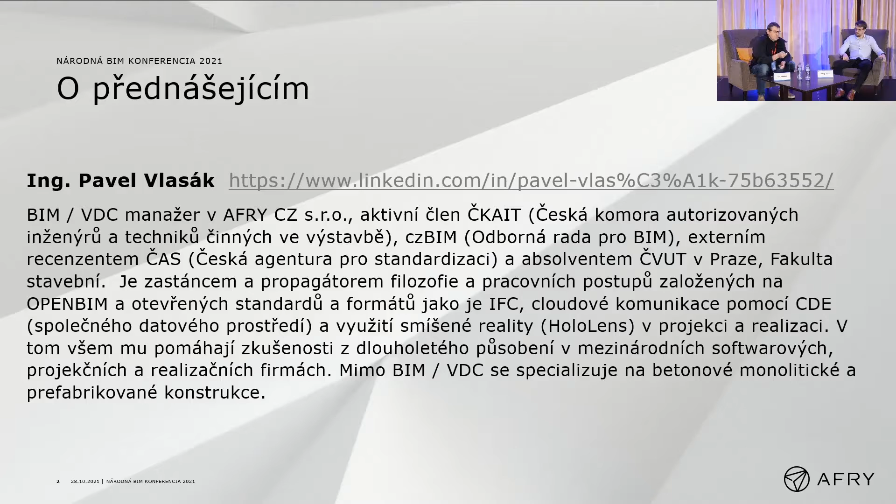We both work at AFRY, an international company with more than 16,000 designers and a mother company in Sweden. We are innovative, transparent, and sustainable. That's what you will see on our web pages.

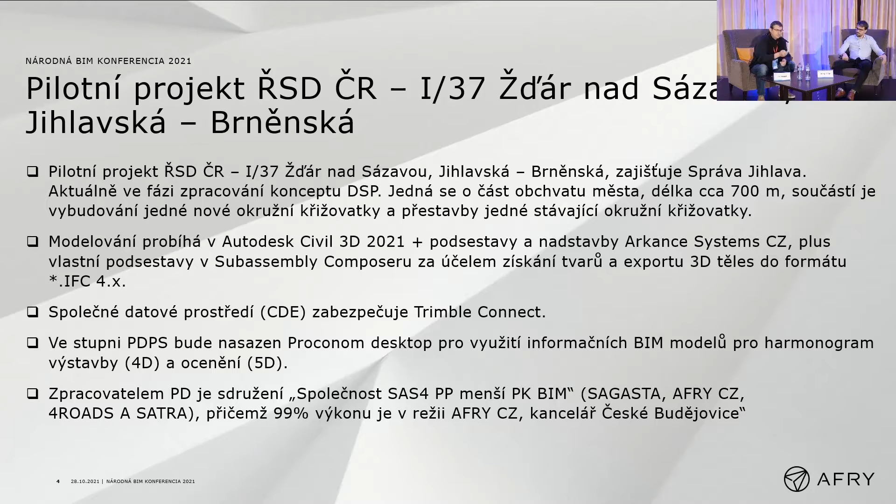Also communication through CDE. We do have an infrastructure data standard, a state fund for transport infrastructure, so we needed to find a way to process the non-graphical information according to the client's specification.

When we look at those 3 or 4 areas, in order to say that the project was processed through BIM, we need the documentation - 3D documentation, non-graphical information processed through BIM - and the output needs to always be in IFC format and according to the data standard of the state infrastructure fund.

AFRY is one of the suppliers, one of the authors of the data standard. Of course, you need to have a BIM execution plan or BIM protocol, and we should communicate through the common data environment.

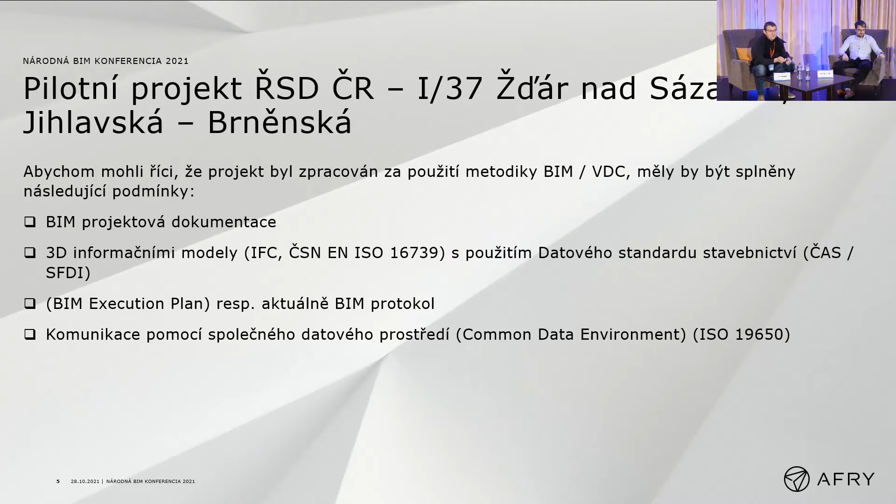Once you are going to check whether a public project was implemented via BIM or with BIM, then you need to tick all those boxes.

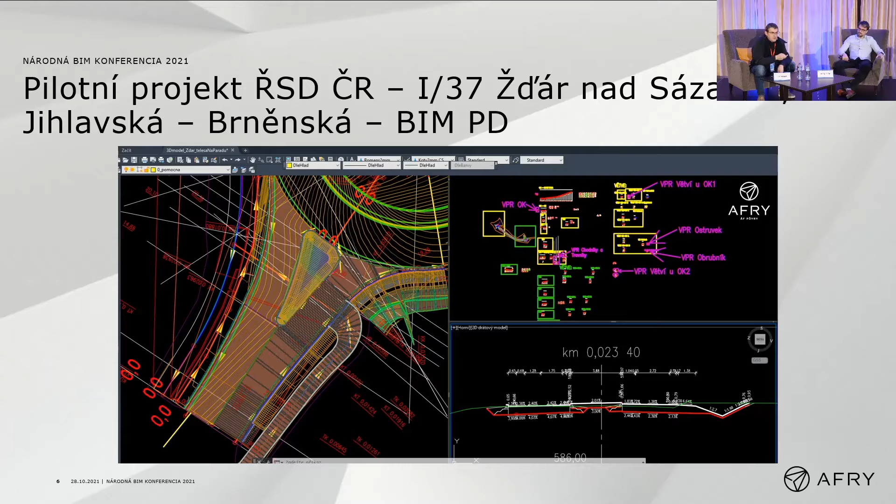This was a road in Žďár inside the municipality, and there was a reconstruction of an existing roundabout and building up a new one. Civil 3D software was used.

We used additional structures supplied by a specific company, but first we needed to build the knowledge inside our company. The communication with the director of highways was organized through Trimble Connect.

You see demolitions, networks, if we knew the location, and the new communication plus the roundabouts were to take into consideration the existing infrastructure and utility networks.

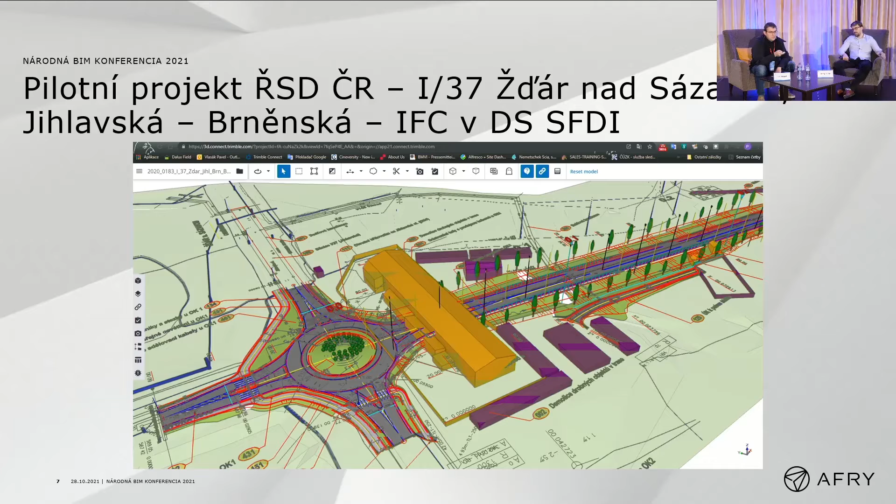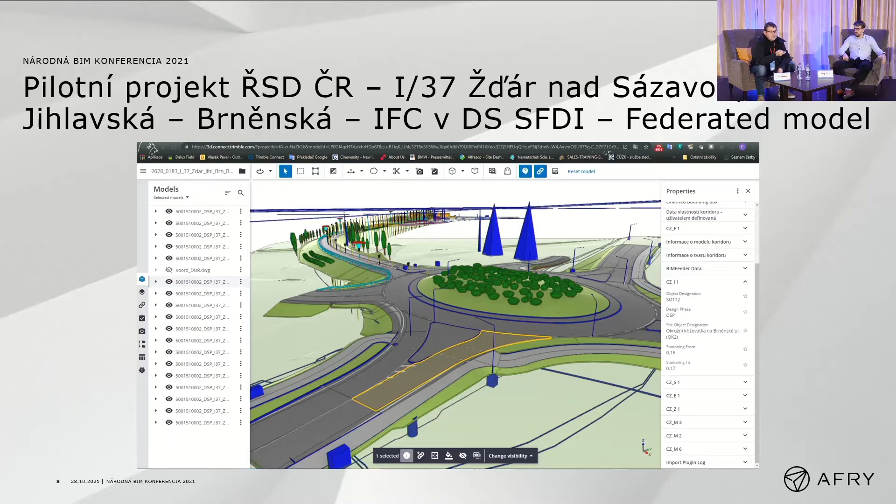We see individual parts of the project according to the data standard. We can validate the data in Trimble Connect environment that comes from the data standard with the real volumes of the objects, and we do cross checks.

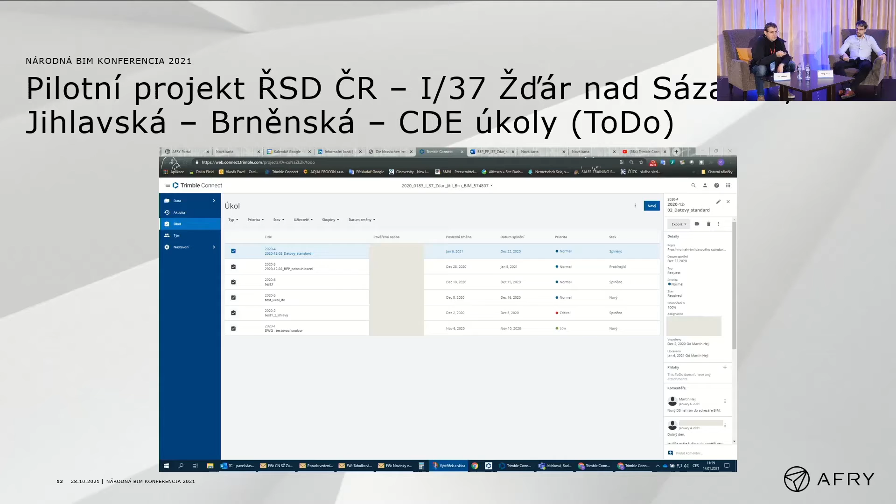We have created the web, and those entities like the director of highways and other involved actors have a certain given structure of their documents, and we communicated with the client and us as designers relatively intensely, I may say. What was very important was the audit footprint with CDE.

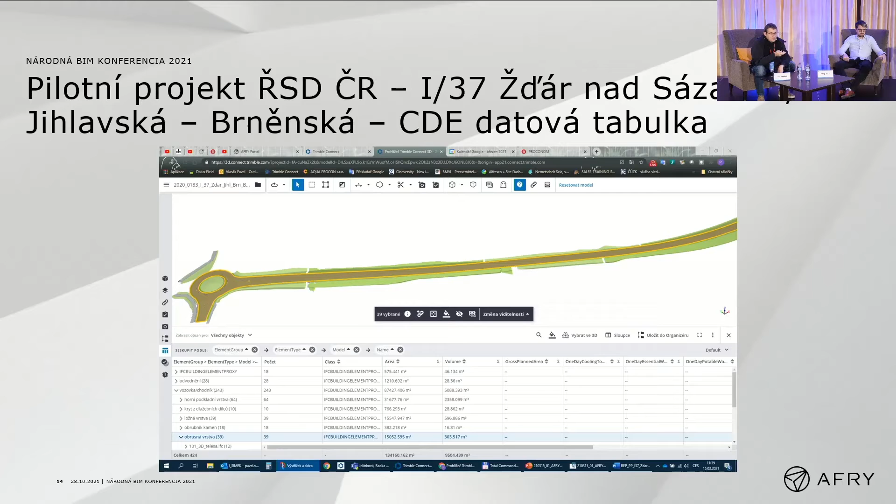This is one of the advantages of CDE - you have all the data in one place. Currently, we are trying to deal with international classification and linking to it, and Proconom company solution is what we use in this project.

And I'd like to hand it over to my colleague.

This is our internal pilot project on how the bridges are designed. I work in the Prague branch of AFRY, and I would like to introduce you to an alternative approach to the design of construction structures - this is parametric design.

It is the use of Dynamo or Grasshopper programs. First, we need to understand what it means and what it is. Computational design is a very important notion for us, and that is an alternative solution or design.

We don't have 2D drawings, but we create machine algorithms that are interconnected and that create the structure as a whole or its individual components.

Each individual script is defined via graphical programming, which is a type of programming that may be more favorable and more understandable for an ordinary designer.

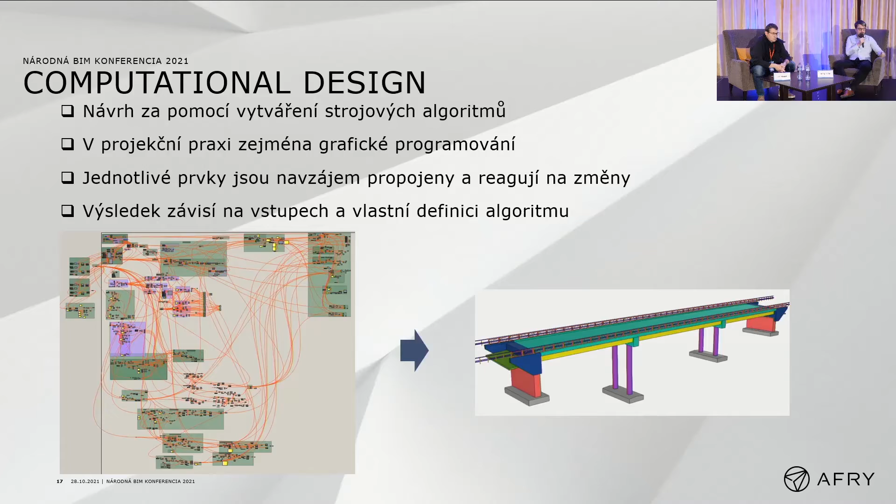Why do I say that? In our department we are trying to get ready for BIM projects and workflow, and we are trying to be one step ahead of the curve - we want to be ready and able to work with those BIM projects very efficiently and in high quality.

What seems to be the most efficient, even though it's not perfect, is to use 3 levels of program. We always have certain inputs that don't need to be BIM or IFC inputs, but we can work with inputs used normally, like Civil 3D or other formats. This input is a 3D axis of communication that we link the bridge to.

Then there is a primary software we use that allows us to model the structure. We haven't opted for construction software but modeling software, because it doesn't limit us in complicated shapes. It doesn't tell us what we need to do - we need to teach it what it should do, but we can get more information out of it or make our life easier. Then we have secondary software.

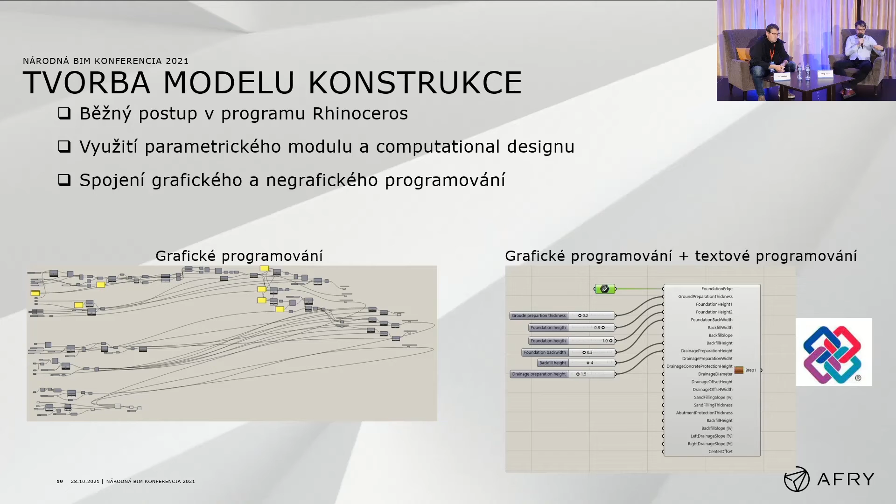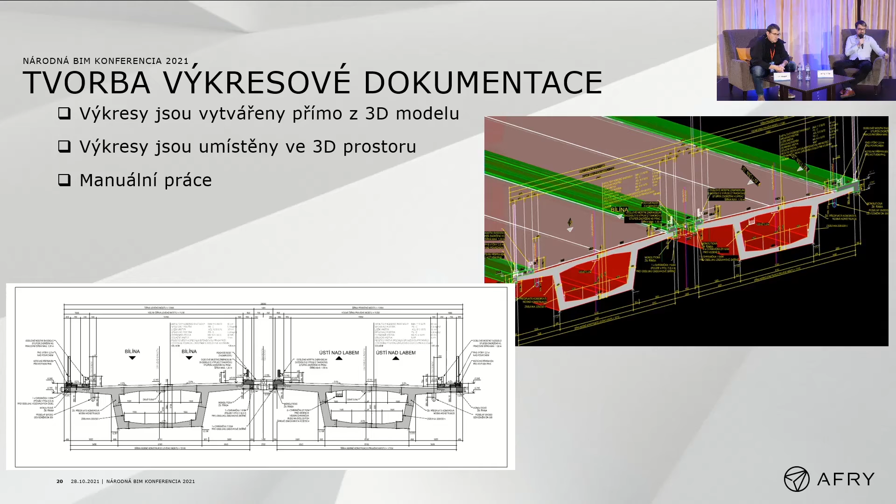When it comes to drawings, there's no rocket science here. Currently, we do drawings from 3D modeling models. We do a cut on the structure, and then of course we need to describe it. Currently we need to enter technical parameters as well. We need to do dimensioning, but how will this change in the future?

We can load the structure into the system. We can change the individual items of reinforcement, and also change the difference and play with the scenarios.

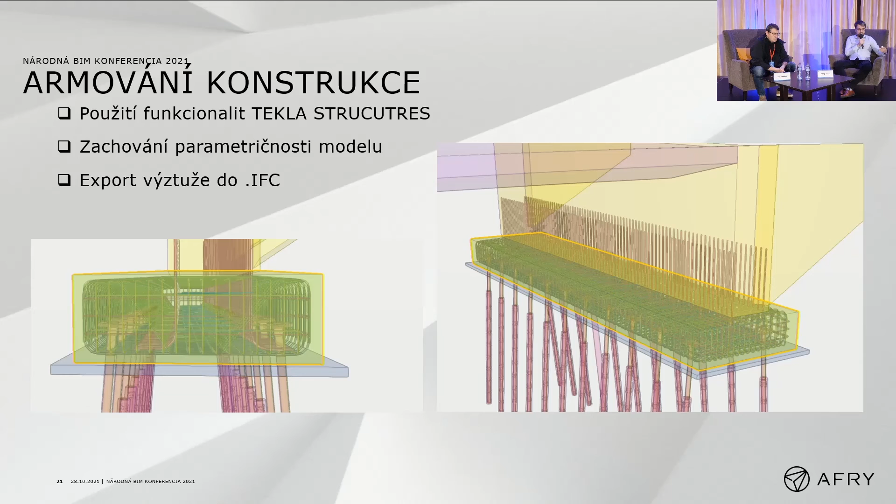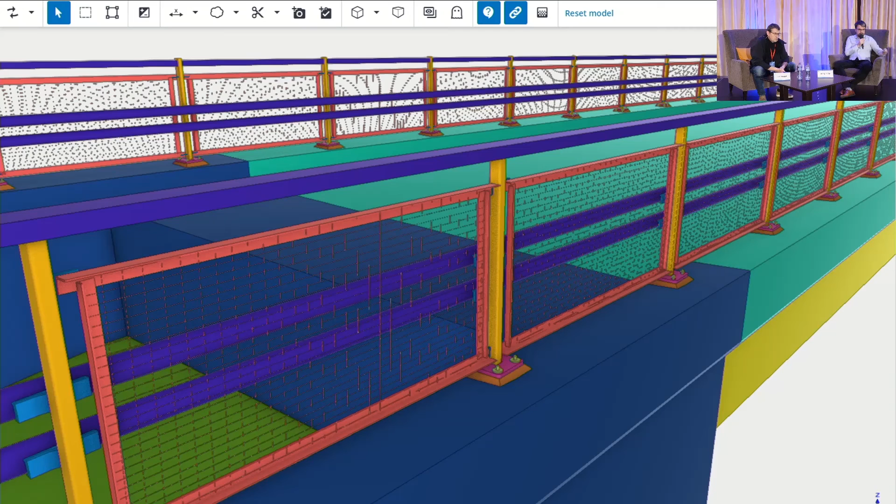Next is IFC format creation. We use native exporters. We can set the level of detail - you see very detailed railing here. And of course, in the export, you need to add it or combine it with data export. I'm not saying that it's constant, but it's different for each and every project.

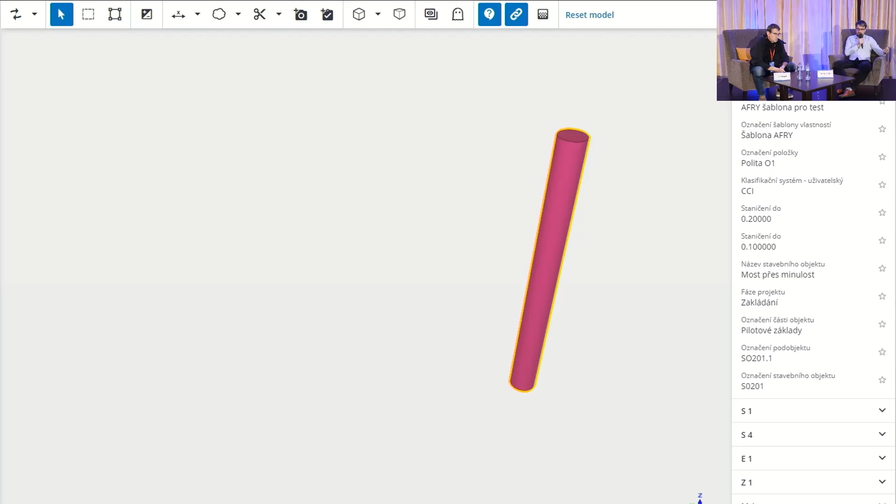Of course, the railways and the roads have different standards, for international standards, for international partners as well. So there is always a possibility of modifying the standard from our side and also adapting it to the needs.

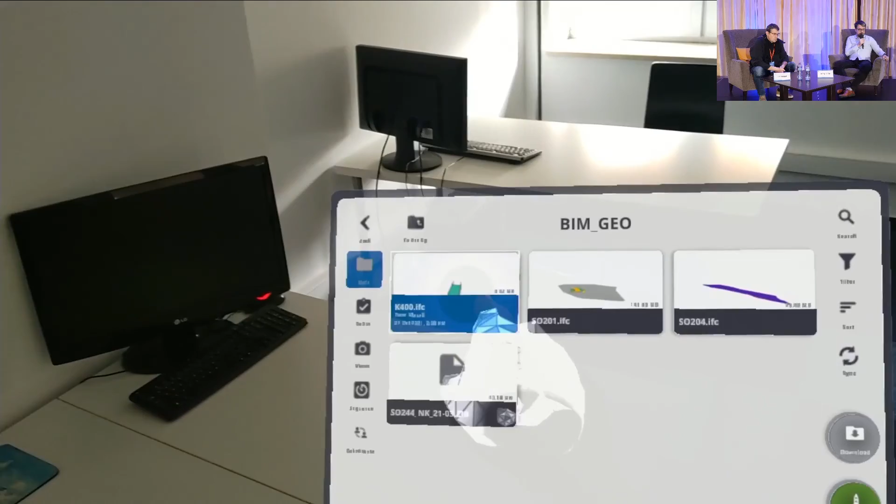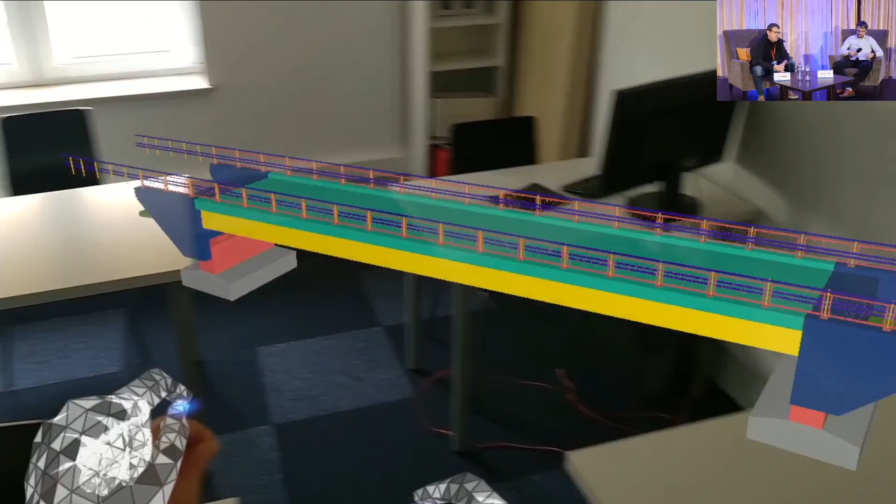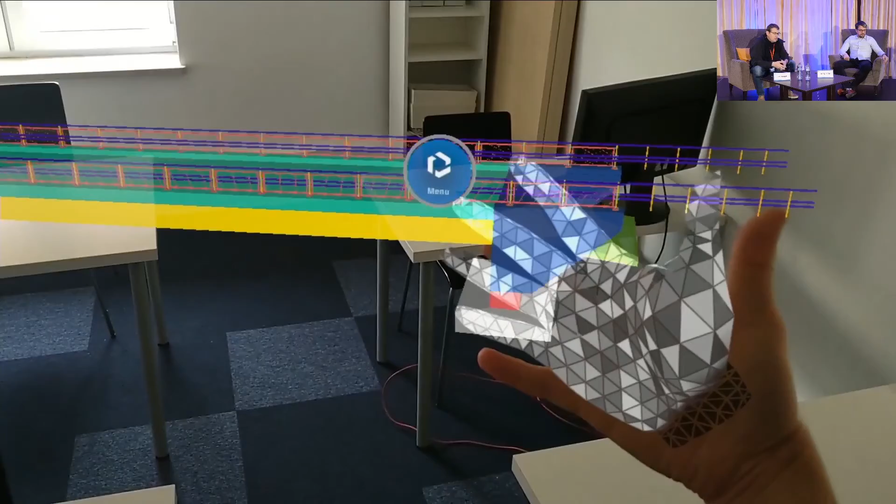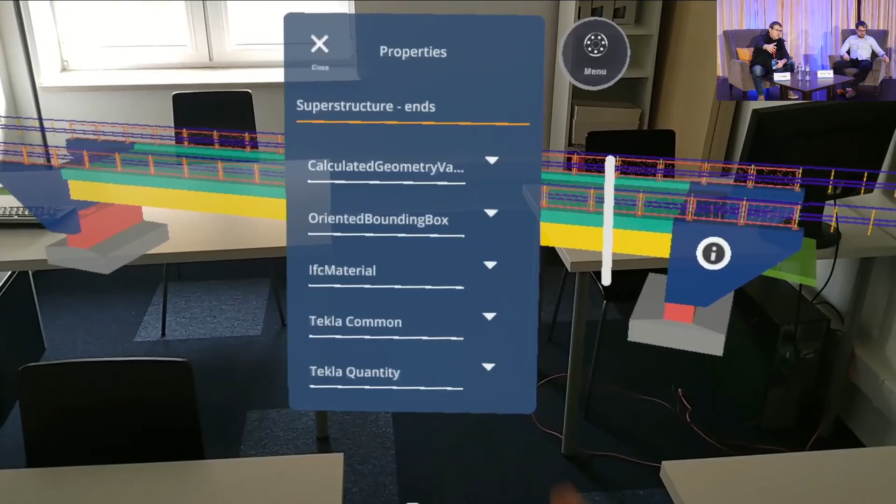This is a model we developed with Norwegians. We communicated via CDE. In the upper part, you see the typical Norwegian type of railing, and they are very digitalized. We believe that this is...

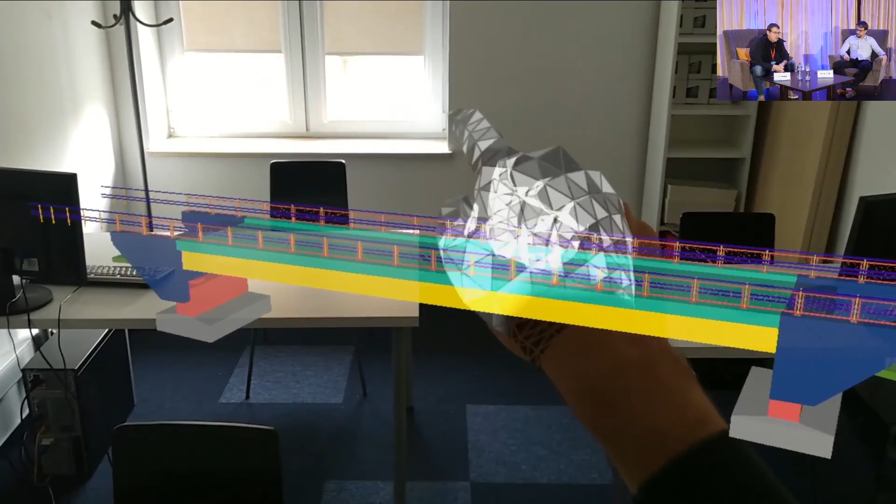I'm not sure how the situation is in Slovakia, but when it comes to the Czech Republic, the legislative framework is good, and we can really use all those tools efficiently.

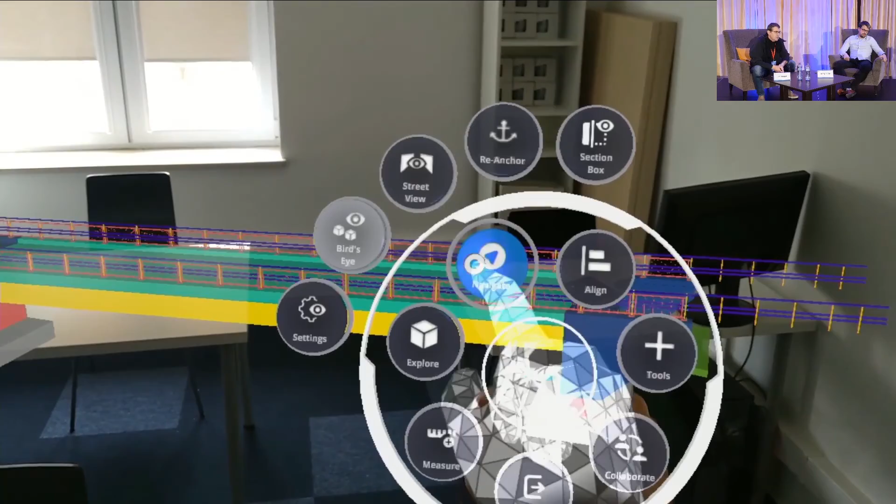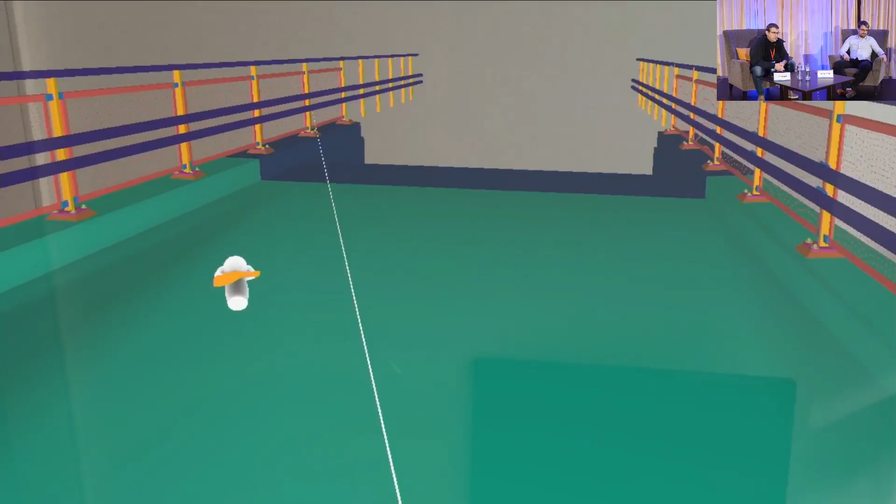We can use augmented reality, mixed reality. Unfortunately, we couldn't zoom it one-to-one, but we believe that VR is good for a developer when you need to have the investor freaking out from excitement and sign the contract. That's funny, but for our reality and needs, we need augmented reality.

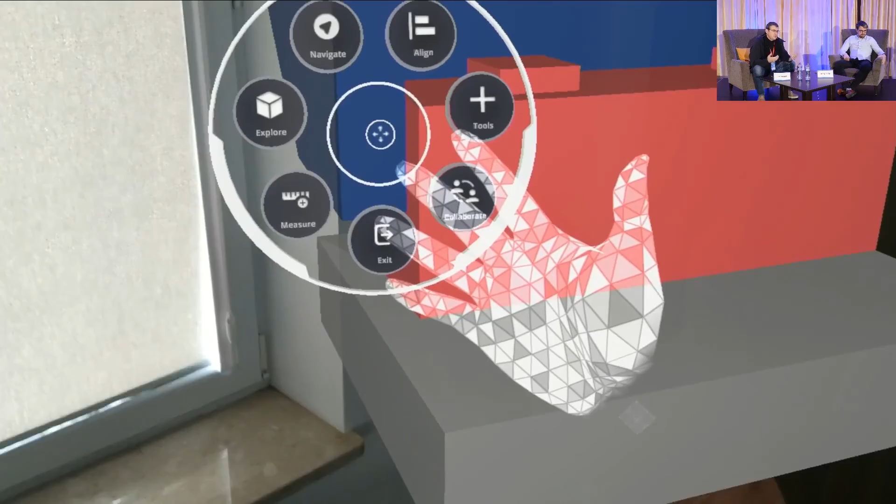This is an international project without drawings. We are very happy for this trend, and we would like to promote it and really roll it out both in Slovakia and the Czech Republic, because we think this is the future, and we kept the time, and that's great.